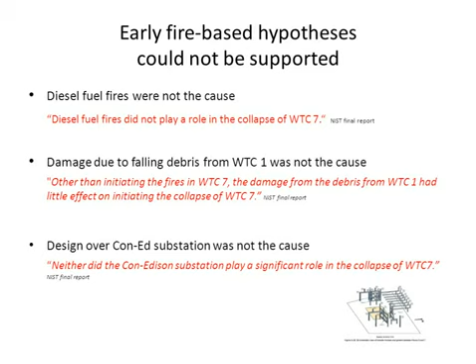The NIST investigation began in May 2002, and NIST put out an interim report on Building 7 in 2004. Two years later, in 2006, NIST's lead investigator made it clear that they had little or no idea what happened to Building 7. We might wonder how anyone could have predicted this building would collapse, given that 4 years into the investigation, government scientists had no idea what happened.

But in 2008, NIST said that what happened to Building 7 was obvious and that science was behind a new explanation. We're going to take a close look at NIST's final theory and discover for ourselves whether or not it is obvious. But we should remember that it is entirely computer-based. NIST did no physical testing at all to support its Building 7 report.

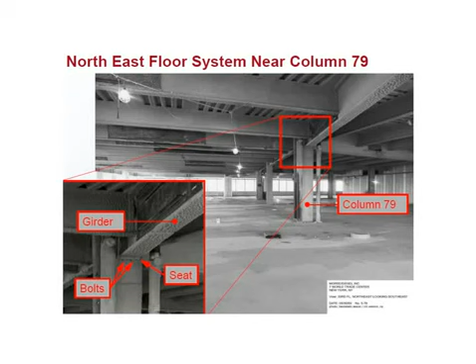Here's a diagram that shows NIST's view of how the floor beams on the northeast side of the building, shown here as purple lines, pushed against the critical girder. The girder connected column 79 to the external wall at column 44. The girder-to-column connections are blown up in the inset diagram, showing how NIST envisions that the girder was pushed off its seat. On the bottom here you can see the pictures that NIST used in its media presentation when it unveiled its final report. The picture is reversed again, but you can see the general idea.

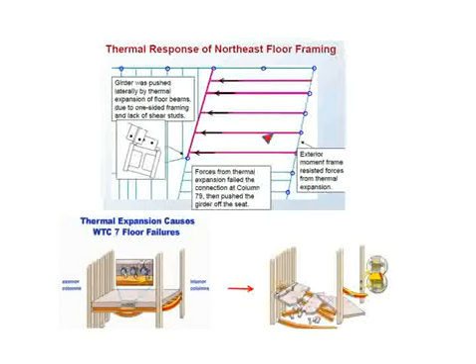The NIST interim report from 2004 said that most of the beams and girders were made composite, or one piece with the slabs, using shear studs. In a deceptive turnabout, NIST did a reversal in its final report and said that no studs were installed on any of the girders.

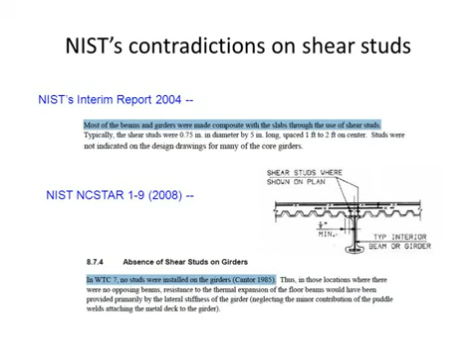Unfortunately for NIST, it was not just its own 2004 interim report that contradicted this vital aspect of its final theory. The presence of shear studs on all the girders was also described by John Salvarinas, the project manager for Building 7, from the company that supplied the steel components. This diagram from an academic paper that Salvarinas wrote in 1986 shows that there were 30 shear studs on that critical girder.

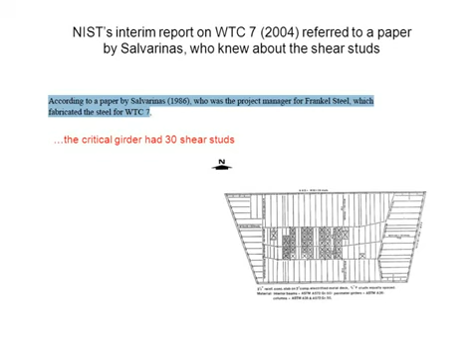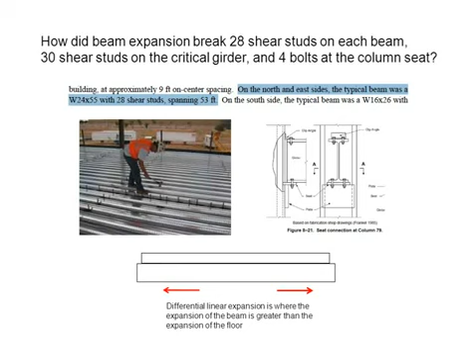Thermal expansion is not a new phenomenon, as NIST suggests, but has been a consideration throughout the history of structural design. You can see that point made here by two building professionals from Australia who wrote a response to NIST on its Building 7 report.

These building professionals reported that they had actually done physical tests to see what thermal expansion would do to floor assemblies. These were just the kinds of tests that NIST should have done. Because they had actually done the tests, the Australians were able to state that the shear studs would not fail, because in a building fire the floor slab was heated as well, and the entire composite assembly would expand together. So NIST's final theory is at odds with actual experimental evidence from the testing of real floor assemblies.

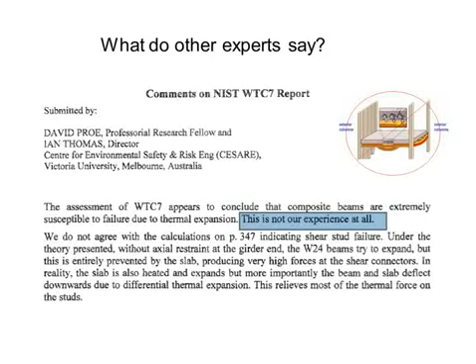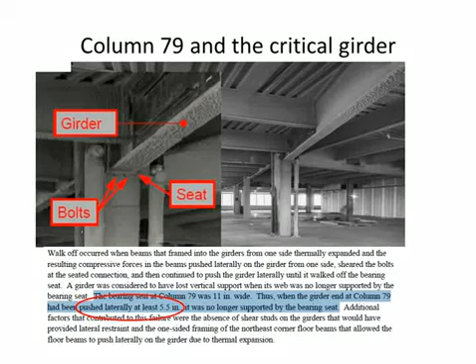To repeat, NIST's final initial failure mechanism for Building 7 was that the critical girder was pushed 5.5 inches by the expanding floor beams. The 5.5 inches was needed in order for the vertical web of the girder, and therefore the center of mass of the girder, to move off of the seat.

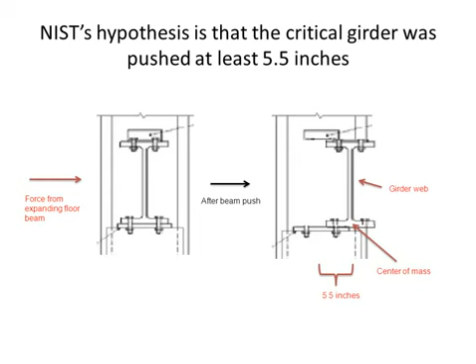Because thermal expansion is a function of temperature, we need to know what temperature NIST says the beams reached, so we can estimate how much they expanded. This was a tricky question for NIST because at temperatures as high as 600 degrees Celsius, the steel will lose strength and stiffness, and therefore not be able to extend into the girder. At the same time, if the temperature is not high enough, there wouldn't be enough expansion of the floor beams.

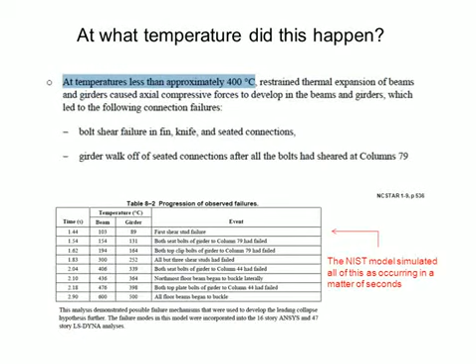What NIST settled on was the idea that the beam temperatures reach 400 degrees Celsius on the northeast corner of floor 12. On this slide you can see an example of just how tenuous NIST computer models were with respect to reality. NIST's computer model had all the steel heating to extreme temperatures and all the bolts and other connections breaking within a matter of about 2 seconds. This is an example of how NIST computer modeling was not realistic.

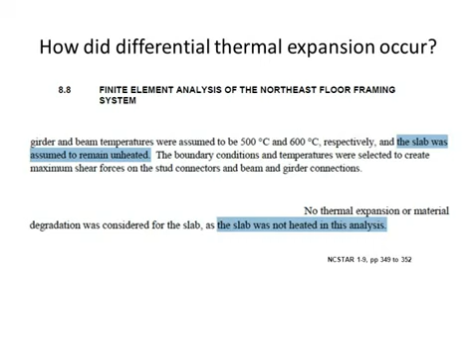Once the temperature distribution needed for its theory was settled, NIST found a way to suggest that the differential thermal expansion could be possible, at least in the computer. They simply didn't heat the floor slab in the computer model. This is what most scientists would call fraud.

But NIST's theory has more problems than that. Given NIST's temperature scenario, the amount of expansion by the beams would not satisfy the amount of expansion that NIST said was required, or 5.5 inches.

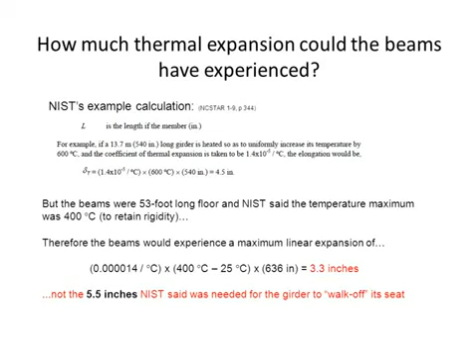NIST provided an example of the equation that scientists use to calculate thermal expansion. When we put the correct values into the equation, we see that the maximum expansion would be only 3.3 inches. And as we already know from NIST, 3.3 inches would not be enough to cause the girder to walk off its seat. We know from the physical dimensions of the girder and the seat that the girder would have had to be pushed at least 5.5 inches for NIST's very improbable scenario to even begin.

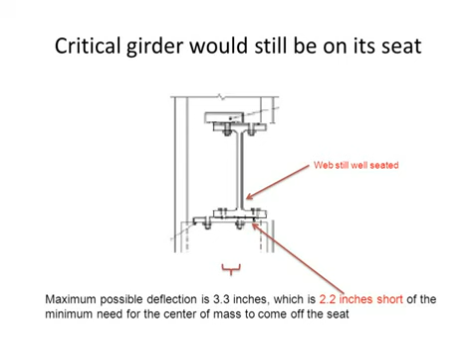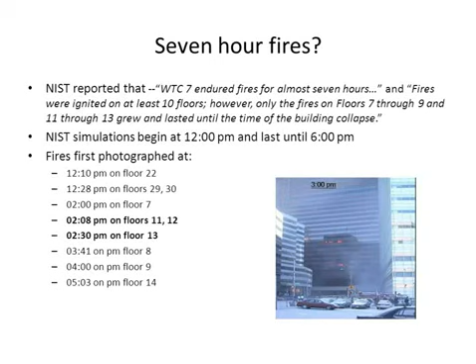Another thing NIST said was that there were 7-hour fires in Building 7, which gave the impression that the fires were very long and very hot. But early photographs did not show fires on floors 11 through 13, where NIST said the first failures occurred, until after 2 o'clock. And the building fell less than 3.5 hours later, so there could not have been 7-hour fires.

Underwriters Laboratories provided the fire resistance information for Building 7. There were requirements for fire resistance of the columns and floor steel in Building 7, just as there is for any skyscraper. The requirements were that these steel components had to withstand 2 to 3 hours of intense fire in standard tests.

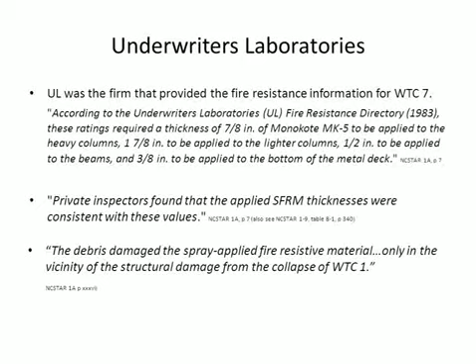One big contradiction that NIST avoided is that its investigators knew that the fire load in the building would only support about 20 minutes of fire in a given area. When the NIST report talks about several hours of fire, it is deceptively talking about the time a fire lasts anywhere on a floor, not in one specific location. Underneath a floor beam, for example, the fire time is only about 20 minutes, as this exchange from a NIST advisory committee meeting indicates.

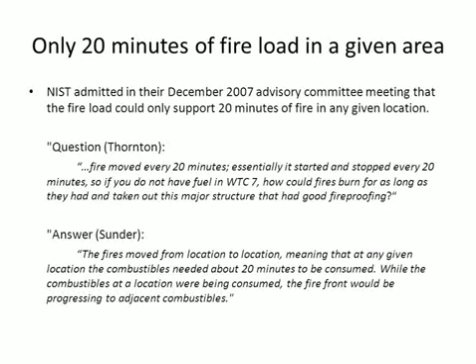We should be able to verify how long the fires lasted in a given location because there are photographs available from various times during the day. But it turns out that NIST did not use the photographs to verify its computer simulations.

As you can see from this comparison of a photo in NIST's report taken at about 10 minutes to 4 and the NIST simulation of fires on floor 12 at the same time, there's no correlation between the NIST simulation and what really happened. At approximately 4 o'clock, NIST's computer simulation shows raging fires across the north side windows of floor 12. The photo from about the same time shows no fires in that area at all.

NIST admits that its models did not use, quote, the observed fire activity from photos and videos as a model input, unquote. Again, this is not science, and this is another example of why the NIST report is false.

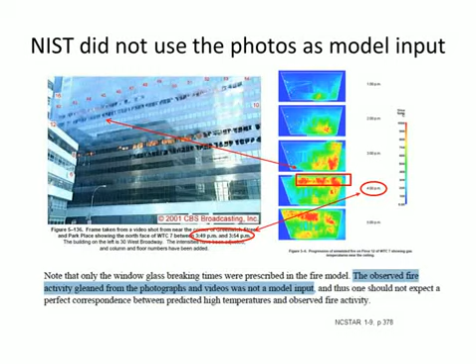Regardless of the fact that the NIST World Trade Center 7 report is false in many ways, we would all like to see how NIST reached its conclusions, but we're not allowed to see those things. NIST tells us that release of that information might jeopardize public safety. But our safety has actually been jeopardized by NIST itself and its lies about what happened at the World Trade Center.

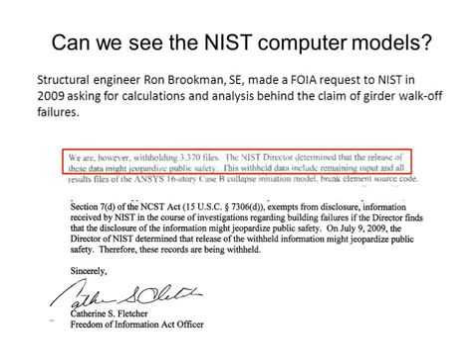NIST failed to explain why and how Building 7 collapsed, and a new investigation is needed.